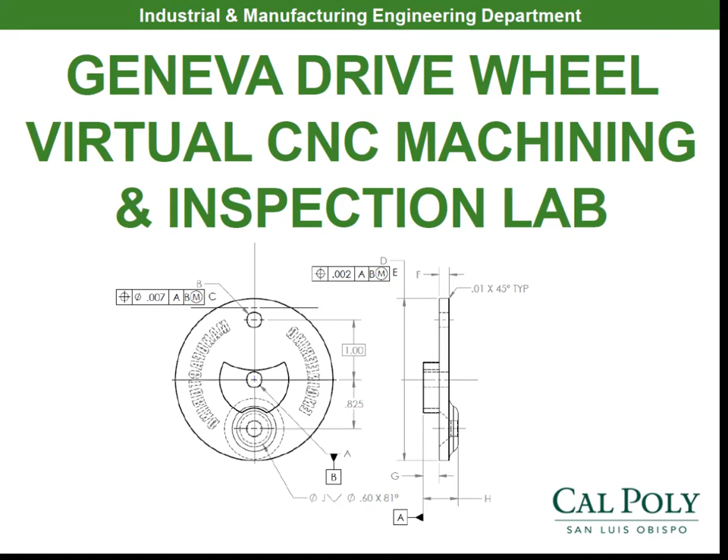Welcome to our Geneva Drive Wheel CNC machining lab. Today, I'm going to take you through the process of CNC machining the drive wheel for the Geneva Drive Assembly.

Remember, this Geneva assembly, when you rotate the Geneva Drive Wheel, it turns continuous motion into incremental motion. It's basically how a watch works, or the tool changers in the umbrella style Haas machine right here has a Geneva wheel inside of it as well. So when it indexes the appropriate tool position, it can take that continuous rotational motion from an electric motor and turn it into incremental motion thanks to the Geneva wheel.

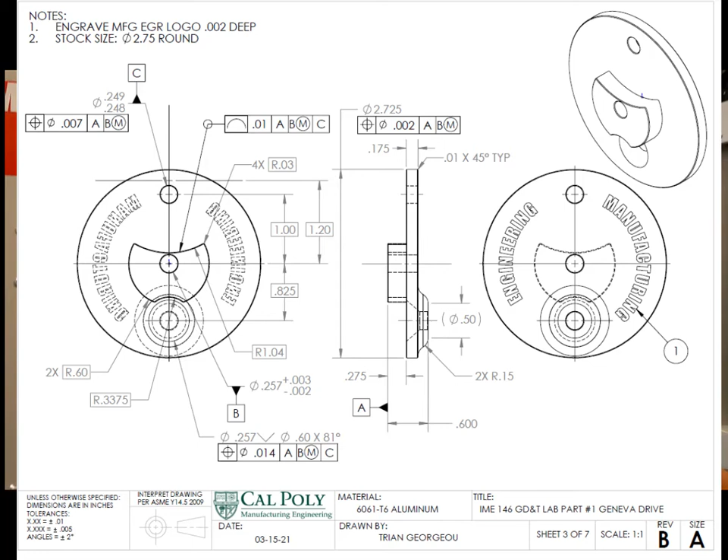The first thing we always do is look at our engineering drawing here for our Geneva wheel. We talked about how we programmed this from CNC operation number 1 and CNC operation number 2 in our lab presentation series, so hopefully you've watched that and know where the 0 points are located. Remember, the work coordinate system is on the B datum right here for the XY, so that's where the 0 point is. It's in the center of the part, or the stock.

We put all of our Z0 points at the bottom of our job. So we decided to start off with 2.75 inch diameter stock. If you look, the major diameter of this part is 2.725, so we'll end up machining 25 thou off the outside edges, or contouring the outside edges of this part at some point.

We will also use a face mill to qualify that surface. We'll use a 3/8 inch end mill to contour it, then we'll use a spot drill to spot drill the holes. We will then use the drill to drill the holes. We'll ream this tight tolerance 249 to 248 hole with a .249 reamer, and then we'll go ahead and chamfer the part right there. So that's going to be kind of the order of operations.

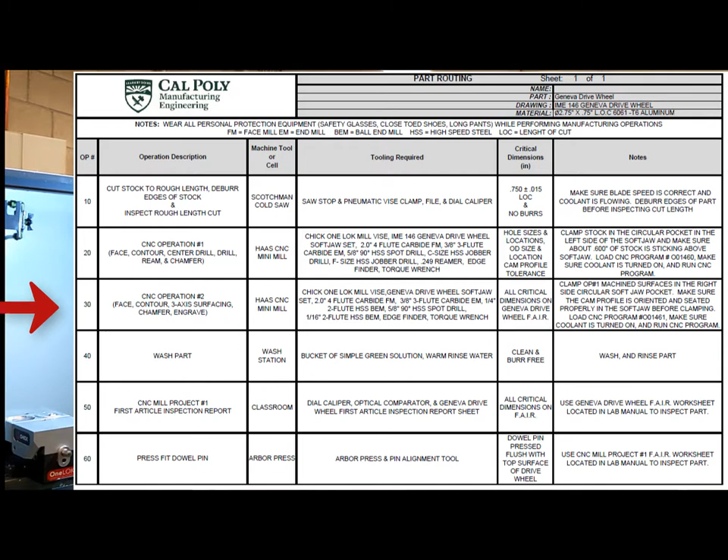Now remember, that's just for the first CNC operation. Check out this routing right here. The routing shows that the part goes first to the saw, where it gets cut to length. In the first CNC operation, it gets everything profiled. Then it moves on to the second CNC operation. After that second CNC operation, we go to the final first article inspection.

So let's go ahead now and start with that first CNC operation. When I look at that first CNC operation setup sheet, I see that my stock needs to be cut to a 3/4 inch length of cut. So I'm going to double check real quick with my caliper that my cut length is correct.

Remember, you zero out your caliper, you go ahead and measure your part, and you'll see I'm basically 7 thou oversized on this cut. We're not worried about 7 thou with that Sandvik face mill there. It'll take off that extra 7 thou, no problem.

So now that I know that I've got the correct stock size, I'm going to go ahead and grab a file, and I'm going to file the edges of my part. Now when we cut this with a saw, the part has burrs around it, all the way around the outside edges. So I use my file to go ahead and deburr my stock before I put it in the vise. If I don't do that, it could sit not parallel to the bottom surface of that vise because it's sitting up on a burr. So we get rid of all those burrs by filing in one direction away from ourselves.

And remember, away, file, lift up, return. That's the appropriate way to use a file. It's not back and forth. It's away from you, lift, and return. So once I go all the way around the part, file it all up, I just double check with my finger. Oh, there's a burr right there. Just double check so you don't have any burrs.

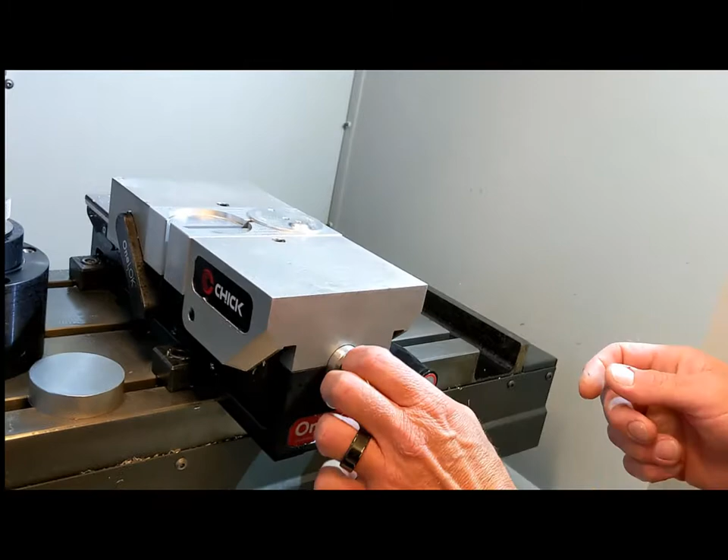Now, we're going to go ahead and check out the soft jaw here. Come on over, and you'll see this soft jaw has been fully contoured. I'm going to leave my wrench right there. Now, the way this vise works, it basically only needs a half of a turn to open and close it. The rest is done by this ratchet system back here.

So once I loosen it one time, I can go ahead and push down on the ratchet and basically move back and forth. So remember, to loosen it, you just have to push one side of it, and you slide back and forth. This only moves a 1/2 of a turn. So let's first put it back here.

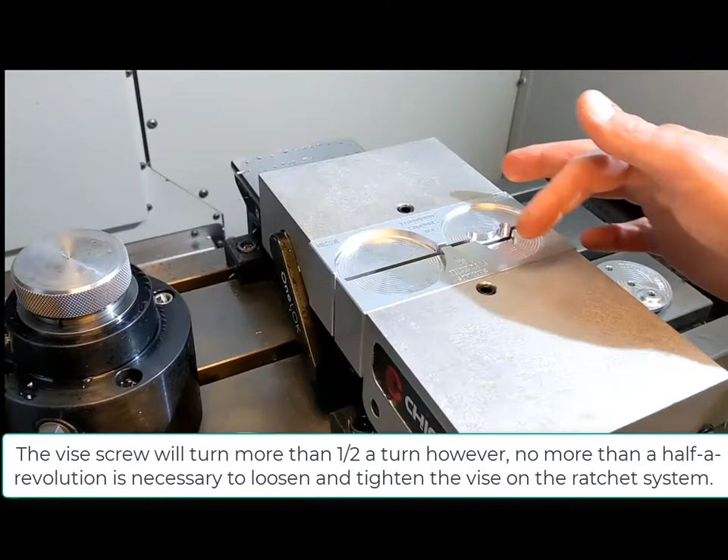This soft jaw has been custom contoured to grab our round stock. You'll see when we put the stock in the soft jaw, we spread it around far enough and put it down in there, it's got a custom pocket contoured to hold this 2.75 inch diameter stock. We want to make sure we deburr the edges, because we don't want any of these edges to mislocate the part.

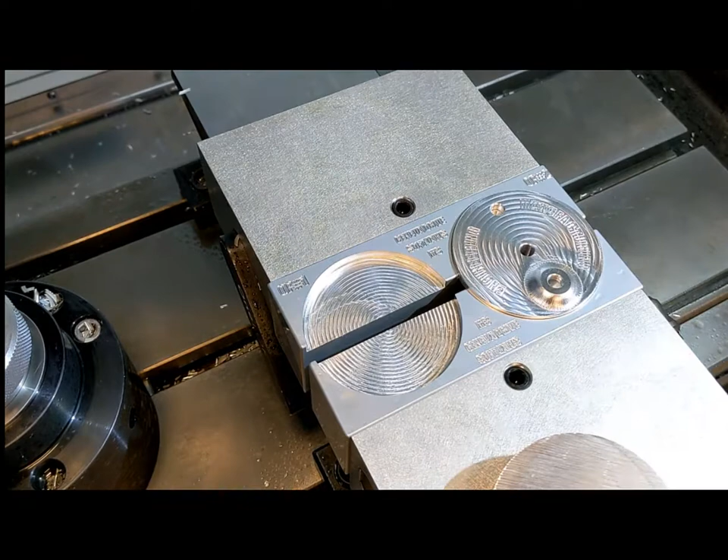Once it gets machined in operation number 1, there'll be a cam profile on the bottom of the part. This cam profile is important to keep the orientation consistent when I flip it from op 1 to op 2. In the soft jaw, we machined a profile down here to orient the part in op 2. So after we machine it in op 1, we'll flip it over, drop it down into there, and it'll orient itself in the appropriate location to get machined.

But before we get to op 2, let me slide this back a little bit. Let's go ahead and learn how to appropriately load and tighten this vise. What I like to do is make sure I'm in the middle of my travel here. If this is hard to turn, you should not force it with this wrench, or you'll end up breaking the vise. So you just want to make sure you can turn back and forth with enough travel both directions.

Once you do that, you put the part in the soft jaw and pull this as far forward as you can so it clicks in. Let me show you - if it was back here, you would just click it all the way forward like that. Now I go to tighten my part by hand, use my torque wrench, and double check that I'm at 10 foot-pounds of torque. I make sure I'm in the tighten position, so the lever's to the right, and I'll go down and tighten my vise like this.

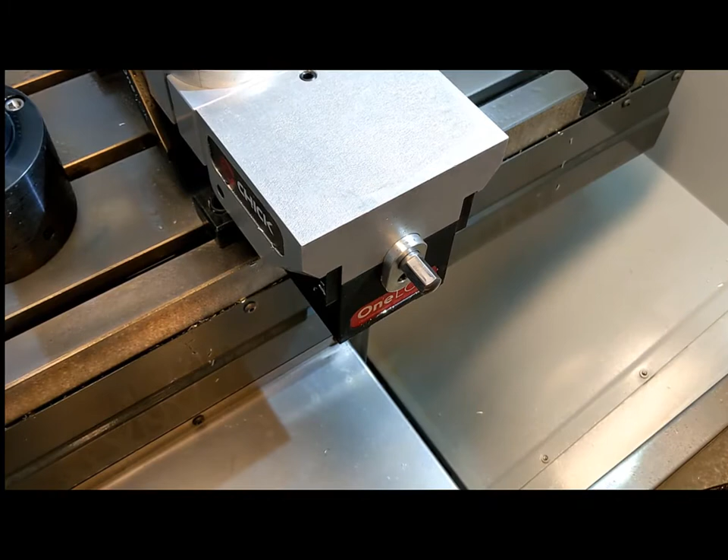Now you're going to see that we have everything tightened. So now we put the torque wrench on here and we tighten till we hear the nice little click. Now we know it's been torqued. To ensure our part is fully seated down here, we go ahead and take the dead blow mallet, give it a nice little tap down, and we're pretty much ready to go.

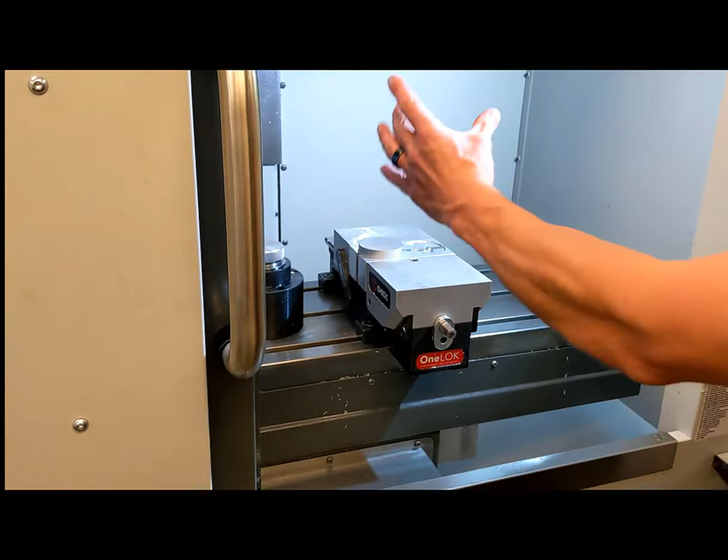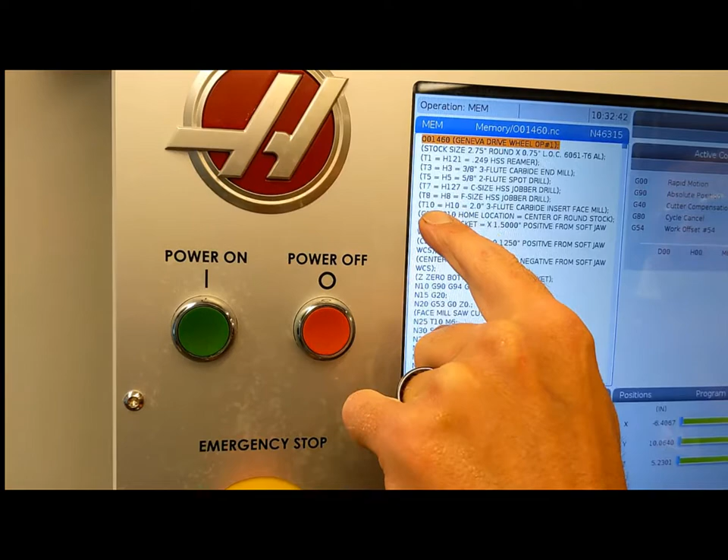So the stock is loaded. I'm going to close my door and come up here to double check my program - Geneva Drive Wheel Op 1 loaded. I definitely do. I'll just read the rest of this. We have the correct stock size. We have tool 1, height 121 for the reamer. That's correct. We have tool 3, tool 5, tool 7, tool 8, and tool 10. So it looks like I'm pretty much ready to go here.

Now that we've verified everything is good in the machine, we're pretty much ready to go - memory, reset, and cycle start, and start machining our part. Here we go.

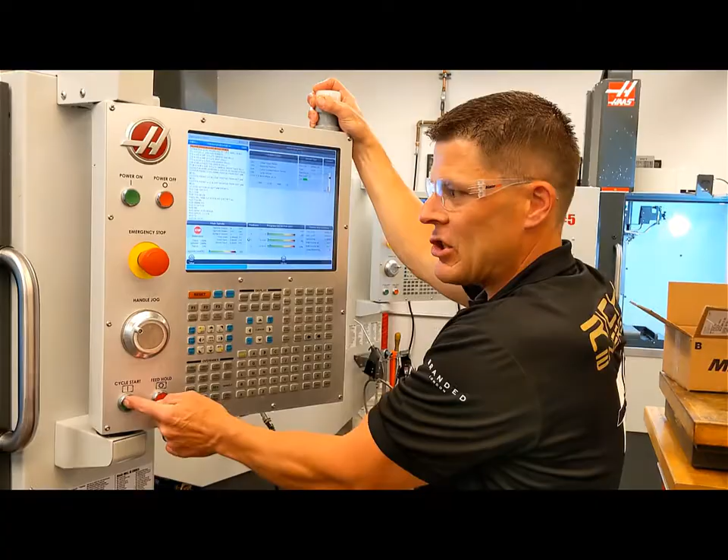So this face mill is facing ahead at 48 inches per minute at 6,000 RPM. We have optional stop on right there so we can show you what each tool path does. That first tool path pretty much just faced the top surface and leveled the playing field.

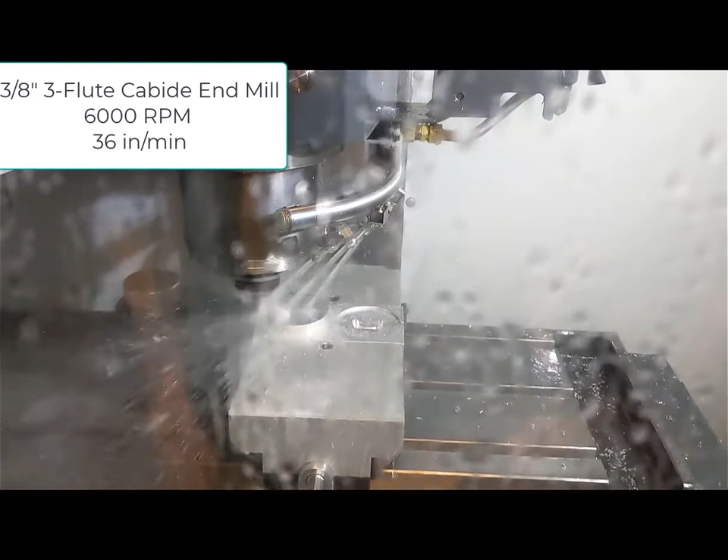Now we're going to bring in the 3/8 inch end mill to rough and finish the Geneva cam. This 3/8 inch end mill is set to a speed of 6,000 RPM. What surface speed does that end up being when this 3/8 inch end mill spins at 6,000 RPM? Can you reverse calculate that using your 4V over D equation? Go for it.

Now that you figured out the surface speed, we are actually running 36 inches per minute for this end mill. If this end mill is running 36 inches per minute at 6,000 RPM and it's a 3-flute, what chip load are we actually running at? Remember, feed rate equals RPM times the number of teeth times the actual chip load. So solve for the chip load now that you know the RPM and the number of teeth.

So what this tool path's doing, it's spiraling in towards the center, and at a certain point it's going to start cutting the cam once it removes enough material, the Geneva cam. Now when we look over here at the code, you're going to see that this code is just moving X and Y all in one tool path. The Z's are going to be the helixes down, where it's moving up and down. But these are simple 2-axis tool paths.

Now at this point, it's going around the outside profile to machine that outside diameter. Now that it's machined the outside diameter, it's going to come in and finish the profile that has that profile tolerance on it with the 3/8 inch end mill in that Geneva cam.

All right, now before we go on, let's check out the part. You'll see we've roughed out all the material and finished the outside diameter and finished that cam profile.

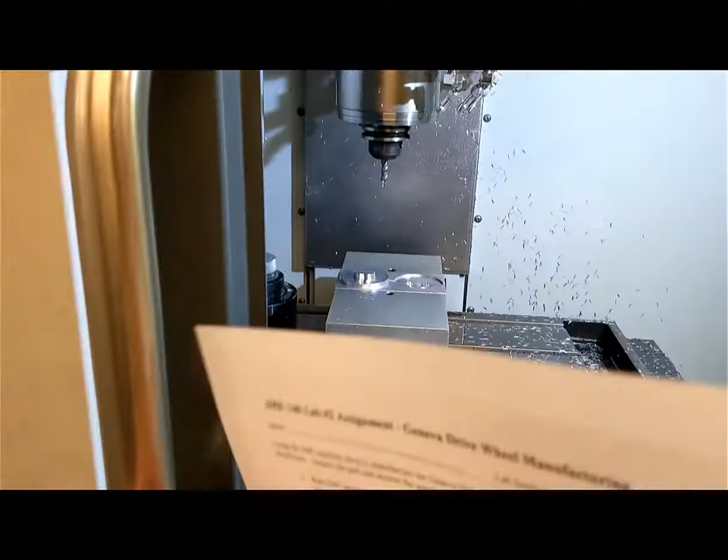So what's next is we're going to grab that spot drill and spot drill the hole locations for the part. Now this is a critical operation because these hole locations have tight positional tolerances in reference to each other. There's 1, 2, and this one's a countersink, so it's going to be a big one.

Excellent, so we have that countersunk hole now for the screw to sit flush for the handle. And we have the other 2 holes ready to go ahead and ream it. So you can see that right there.

So now that we got the hole spotted, we're ready to get the C-size drill out and go ahead and drill the hole for the ream. Now reamers don't like to take off more than about 10 thou of material.

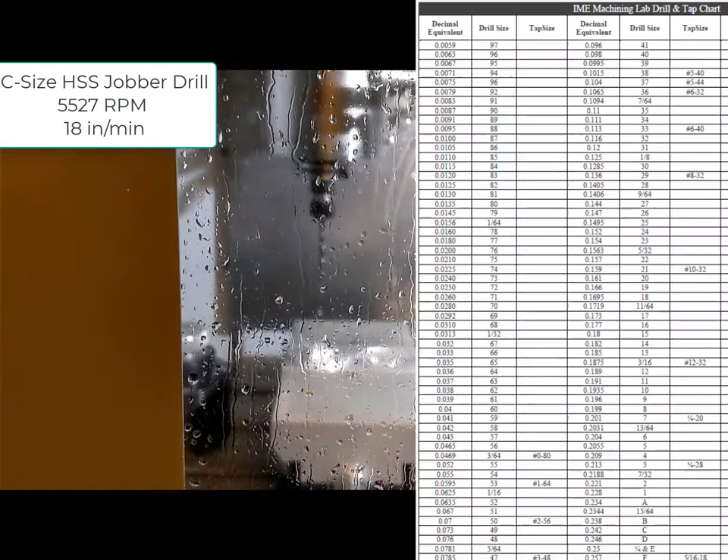So this C-size drill bit has been selected to drill the hole for that .249 hole, the .249 or the .2485 reamer. So what size is that letter C jobber drill? Look up in the drill and tap chart and tell me how much we're actually taking off in order to get from the C-size drill to the actual reamed hole size.

But now that we got that hole drilled in there, you can see that, we are going to move on to the F-size jobber drill to drill the holes.

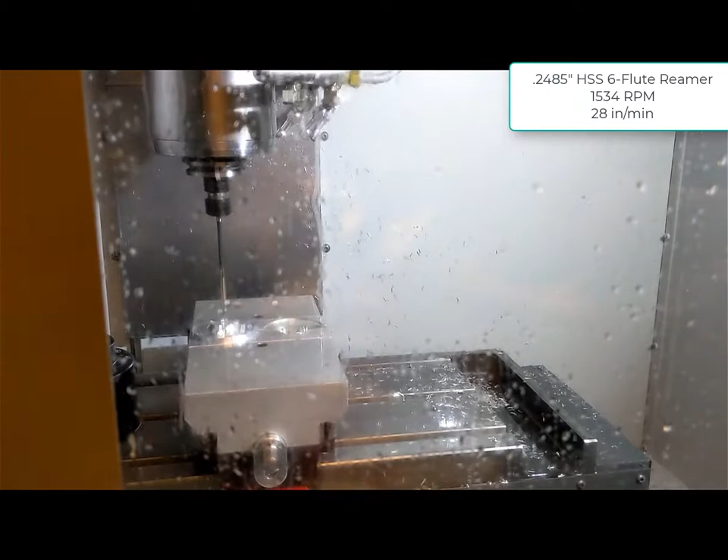At this point, we're grabbing the F-size jobber drill. It drills straight through the part right there, no pecks. And we're going to open that up and show you that all the holes are now created in this part. So what's next?

We got to make sure we don't cut anybody when they hold on to our Geneva Drive Wheel. So we're going to get that tool 5 out again, that spot drill, and chamfer the entire part.

Now that the program's all done, we switch back to the original tool, so it's ready to go again when we load up some more stock. Bring the table forward for the operator. I'll open the door and we'll see how we now progress to the next CNC operation.

So I'm going to grab my torque wrench. I'm going to open up the vise. And remember, I just did a real quick turn and I slide the vise backwards to pull the part out. So you're going to see there, we now have the full profile of the part machined right there.

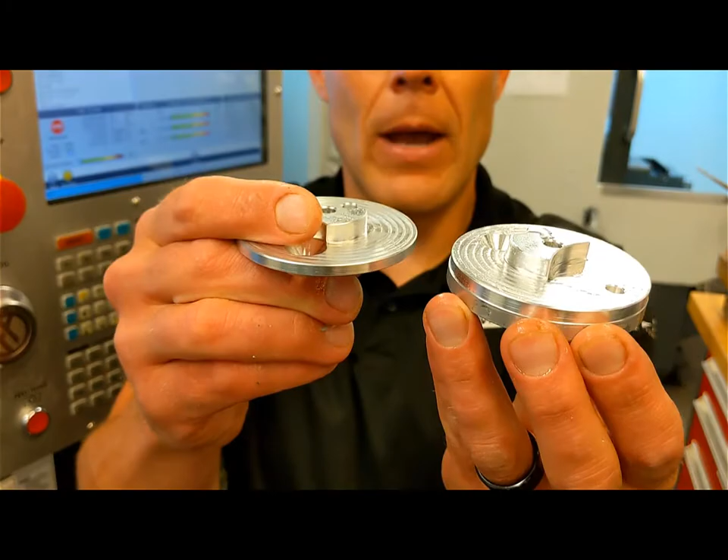You see that? So we've got to go ahead now, flip it over and get rid of all this extra material on the top so we can make that little 3-axis hump. And we can see the difference between 2-axis and 3-axis tool paths, like I showed you in the programming stage in the CAM presentation video.

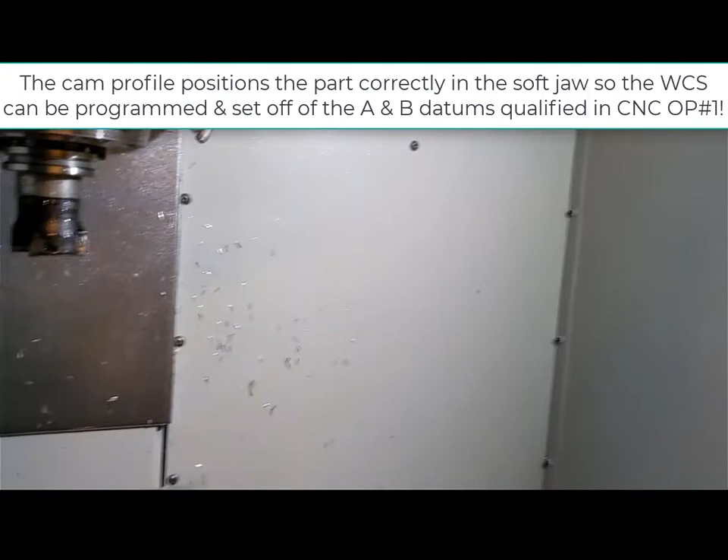So in order to orient that correctly, remember our soft jaw is going to grab this cam and orient it appropriately in the machine. So let me put back that part. We're going to come back over here. I'm going to move the vise over a little bit so we can see it better.

And what I'm going to do is put it down here in the soft jaw. You're going to see that it locks into the correct position right there. You can't twist it anymore at this point. I pull that forward and then I hand tighten my vise.

At this point, I'm going to grab my torque wrench, put it on to 10, and torque down my part. Once I torque it down, I like to use the dead blow hammer to make one tap on the part so it fully seats in the vise.

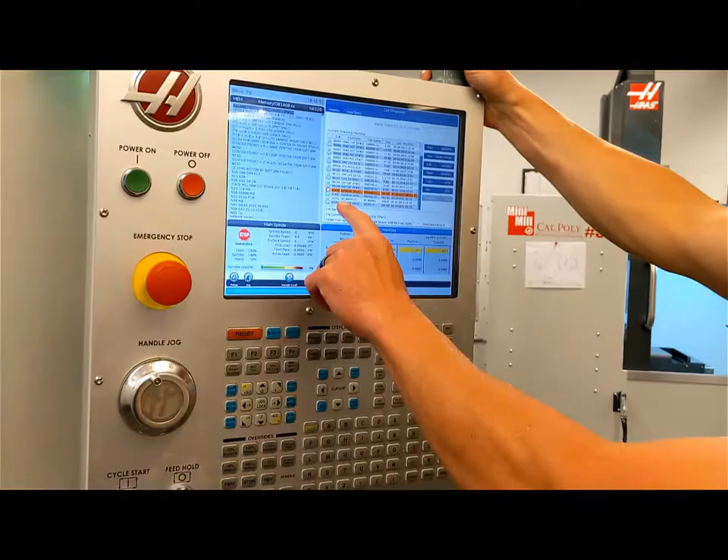Then we'll close the door and come over here to the control, and when I hit list program, I can now move over to my Geneva Drive Op 2. When I select that one, I come down here and hit select program, and then when I hit memory, it says Geneva Drive Wheel Op number 2.

Stock size machine Op 1 blank, we got that. And we got tool 3, 4, 5, 6, and 10 now. So we're gonna go ahead and use the 3/8 inch carbide end mill to rough away all that material off the top.

We're gonna use the 1/4 inch 2-flute ball end mill to go ahead and do 3-axis work on that protrusion sticking up with the fillets on it. We're gonna then use the 5/8 inch spot drill to go ahead and chamfer the holes and the outside of the part. And then we're going to use the 1/16 inch 2-flute ball end mill to engrave the best major in the world, manufacturing engineering, on the part.

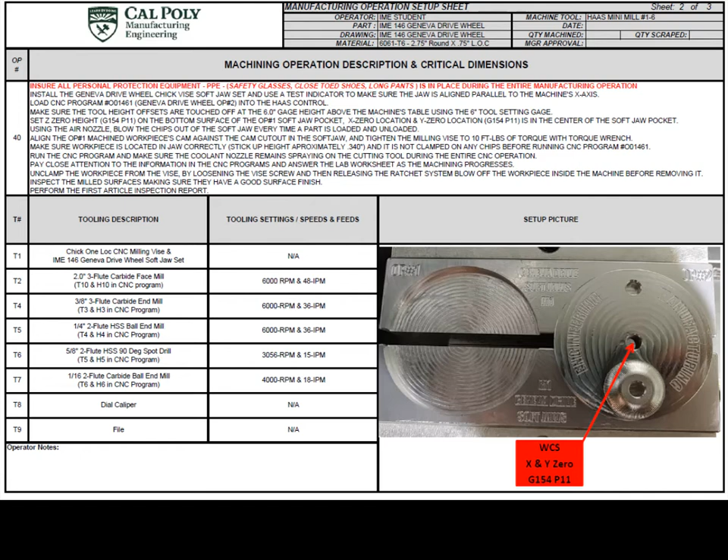So here we go. Cycle start.

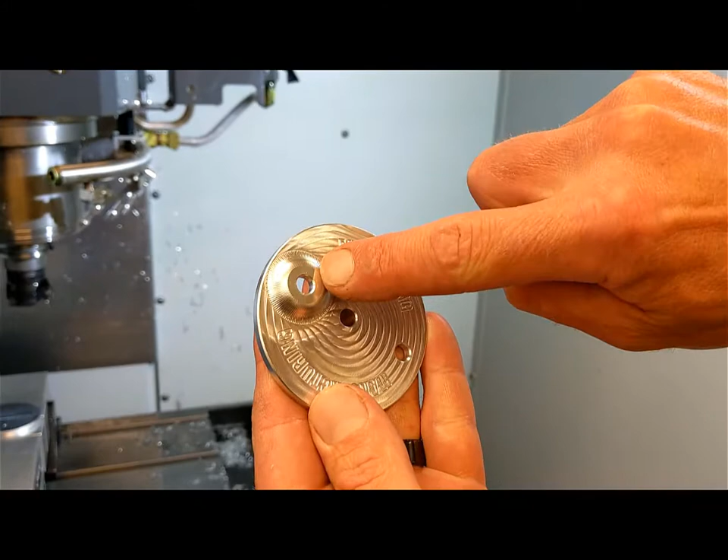So at this point, we'll go ahead, check that out. You see, we see the hole from Op 1 right there, but we've now faced it down to the appropriate height. Now that appropriate height isn't the height of the top of the part right here, it's actually the height up here. So we faced it to this height.

Now we're going to use the 3/8 inch end mill to rough the rest of this other material away. So here we go.

All right, so that basically roughed out. That was a 2-axis tool path. So it moved down in the Z and then moved in the X and the Y, and it roughed out the big amount of material needed to go ahead and now use a ball end mill to go ahead and finish the 3-axis milled surface.

So we're going to use that ball end mill to rough and finish now the 3-axis surface. Here we go.

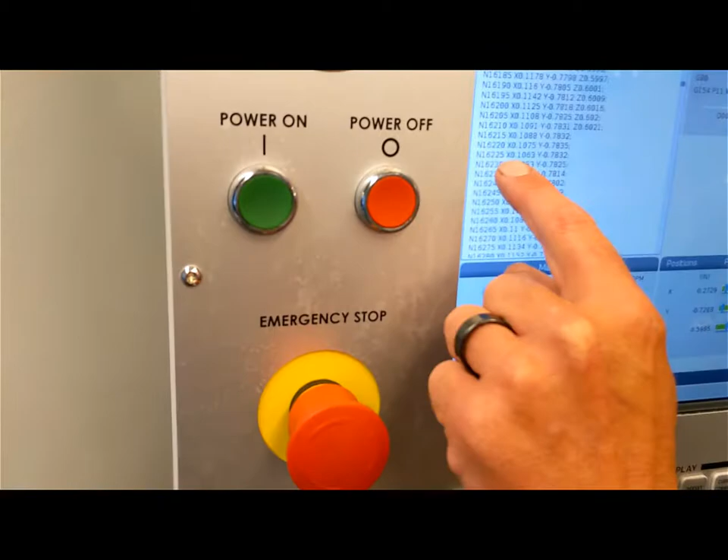All right, now you can see it. Let's check out the screen right here. You'll see there's XYZ moves on every single line of code right there. In fact, it's verifying that it's at all those locations with that encoder.

It can think, or it can process data faster than we can even think. So now check out this code right here is making a move up and down the sphere right over there with those 3-axis moves.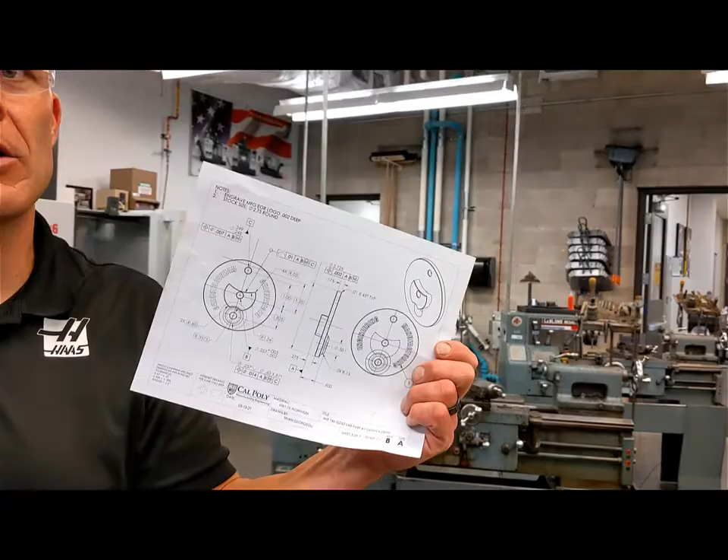So this is our Geneva wheel. We now need to take our engineering drawing and bring it over into the inspection lab to inspect these true positional tolerances. Join me over in the inspection lab, and we're going to see how close we are on our true positions from the B datum to this hole, and our true position for the outside diameter to the actual B datum. I'll see you soon.

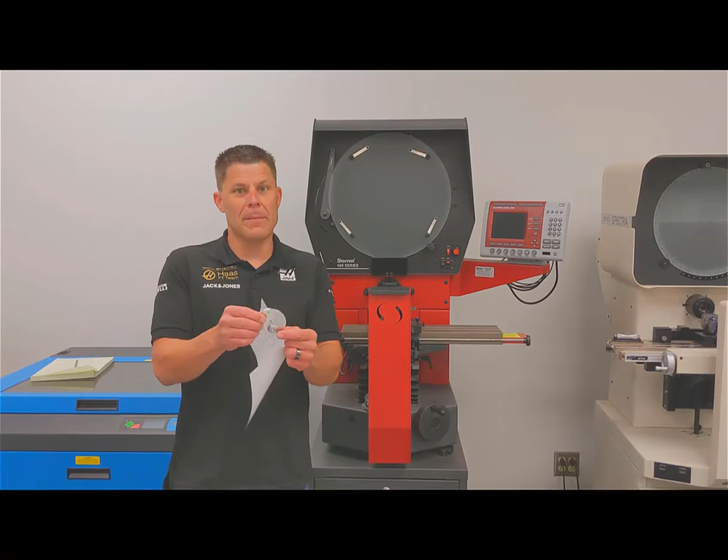Welcome to our Geneva Drive Wheel's first article inspection demo. Today we're going to learn how to calculate the positional tolerance for this hole and this outside diameter relative to the B datum right here in the center of the part.

Looking at this engineering drawing, we see that the main datum is the B datum. The A datum is the bottom surface of this part, so the B datum right here is this .257 hole. Everything rotates about this .257 hole. That's why it's the datum - it's the main feature on the part that everything relates to.

Now, in order for the Geneva Drive Wheel to drive the Geneva wheel, there's a pin located in this upper hole, which we call the C datum. We'll talk about that in a minute. But this hole is going to be positioned relative to the B datum, basically perpendicular to A right there.

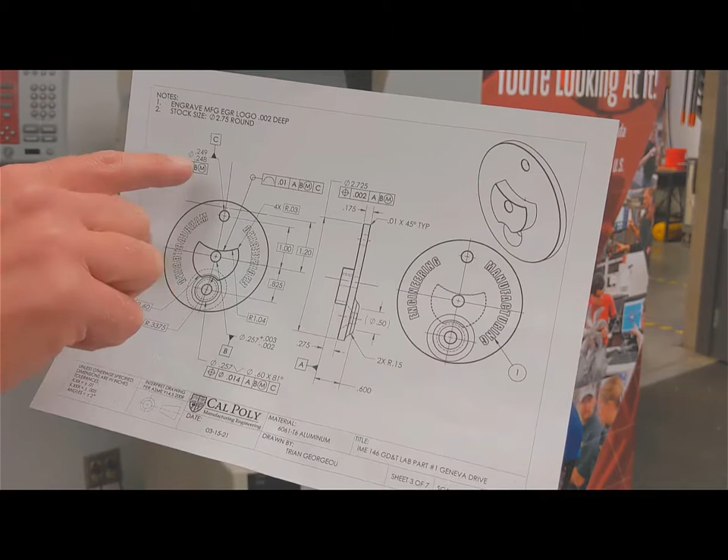So we're going to check to see if this 0.249 to 0.248 hole is first in size. If it's within the size limits, we're going to calculate the positional tolerance and make sure it's within the diameter tolerance zone that it needs to be within for the design to function appropriately.

After we do that, we're going to check the outside diameter of the part, the 2.725 inch diameter, and make sure that positional tolerance is within 2 thou of the B datum when it's at its maximum material condition. So we're going to do that on our optical comparator.

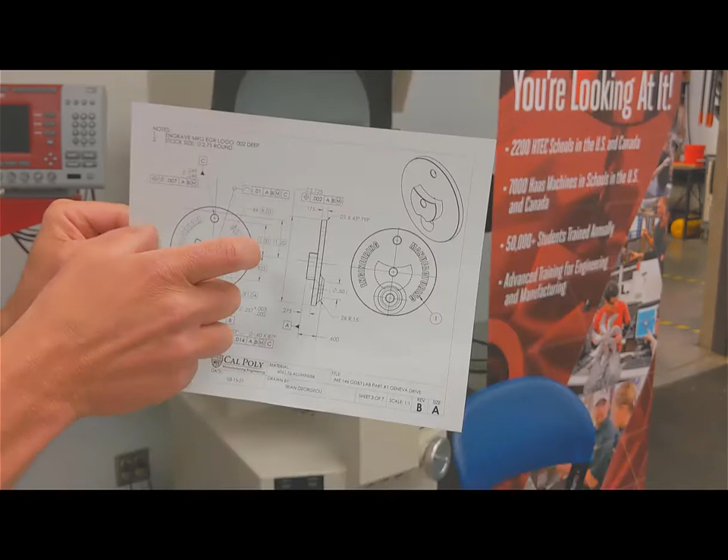We wouldn't be able to do this by measuring it with a caliper unless we had some sort of fixture to show us the delta X measurement and the delta Y measurement from true position. Let me explain that a little better here.

So when we have a positional tolerance measurement, we're measuring how far we're off from true position. For example, if I looked at my drawing and saw that the datum, A, is at this point, I will have a basic dimension locating the true position of a hole off of that datum - a basic dimension on the drawing in both the X and the Y axis.

When you go to actually inspect the actual part's location, you'll see when we manufactured the part, let's say the center of the hole was placed right here. What we've got to do is determine how far we are off from true position in the X-axis and the Y-axis.

To do that, we're going to first set up the optical comparator over here to zero it out on the center line or the center datum on the part. Then we'll measure the hole's location and determine how much delta X and delta Y we have from that.

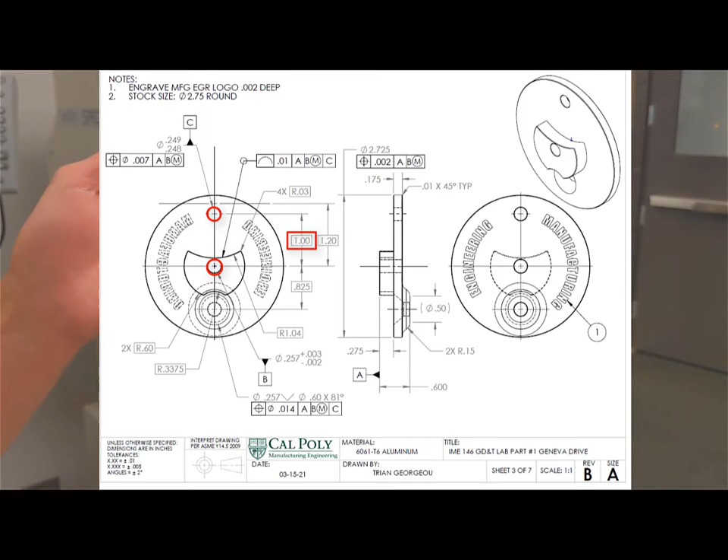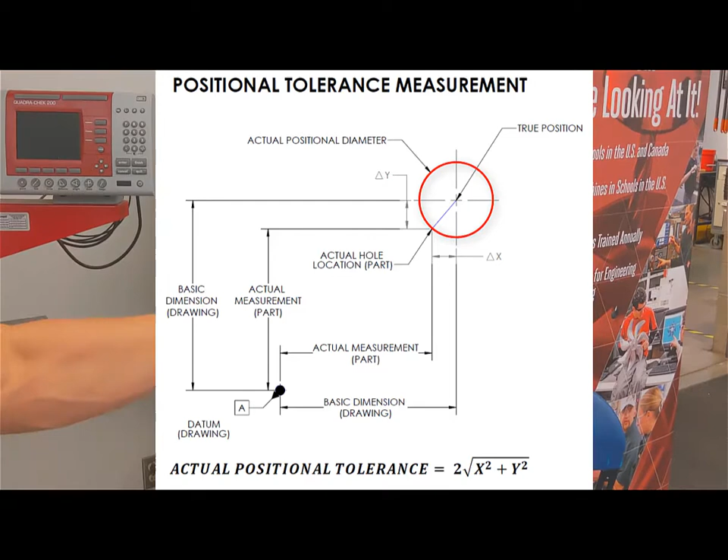We'll get the actual part measurement there, and then we'll do a simple calculation using the Pythagorean theorem to figure out this radius value, and when we multiply that by 2, we get the diametrical tolerance zone, or the actual positional diameter that the part has. We'll compare that to the actual tolerance on the engineering drawing and make sure we're under that size. So let's go ahead and do this.

Remember, we're filling out this first article inspection sheet as we go through here. So looking at that sheet, we're going to first find the feature ID A, the center datum hole size. Let's do that real quick.

Now, this is an optical comparator right here - a Starrett optical comparator. Just so you know, cost, it was about $30,000 in 2015. It's got a control panel over here that can calculate radii, circles, distances, and angles out there in space.

The whole principle of an optical comparator is to magnify your part. There's a set of lenses in here that can be replaced. You can get 25 times magnification, 10 times, 5 times - different magnification levels. I believe what we have right now is 20 times.

It says X20 right here. So the way it works is there's this lens right here. When I turn the power on, I have a surface and a profile light. What that surface and profile light does is it allows me to either look at the surface of the part magnified or a profile of the part.

I want to go ahead and look at a profile of the part because I want to look at the holes. It'll be a black and green image. Wherever there's a hole, it'll be green. Whenever there's material, it'll be black or a shadow.

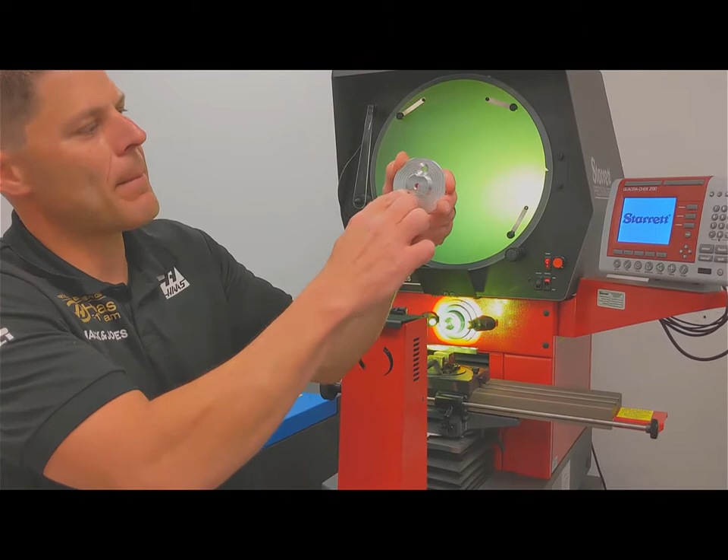Now you're going to see we're going to have to fixture that right here in order to measure our part. We're going to first place this parallel bar down on the vise, because we're going to locate this part on the cam profile. We're going to set it down on this cam profile, which will orient it in space the way it's supposed to be oriented on the engineering drawing.

At that point, we can then focus it and figure out where this center hole location is. So to fixture this, I'm going to put it down on the optical comparator in the vise, make sure it sits nice and flat on my parallel, and then I tighten my vise down so my part doesn't move.

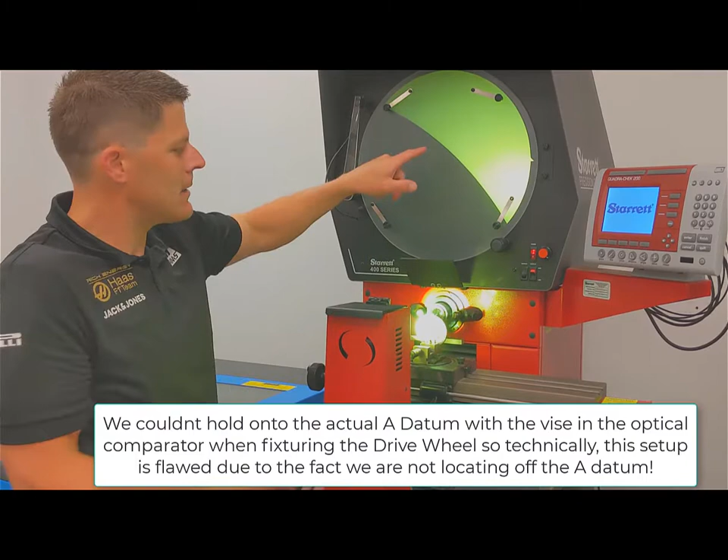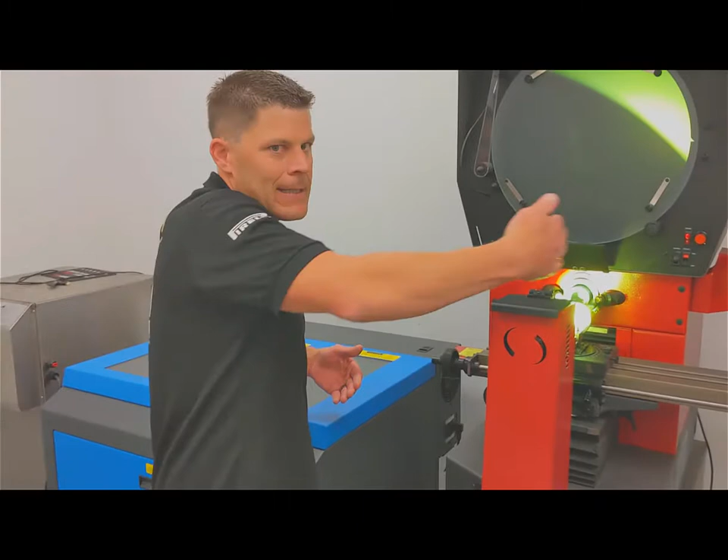Now you'll see up here on the screen, I can see some of my part. The way it works is there's handles right down here. This handle is technically the y-axis. This handle right here is technically the x-axis, back and forth. Z-axis is focus. So the focal length is the z, x is this direction, y is this direction on this machine.

So our goal is to find the center hole first. Let's move it over. That's the upper hole, so we'll go down. We want to go ahead and line up the crosshairs in the center of this hole. So you'll see I center my part right there. And now I want to get a nice, good, crisp image of this hole.

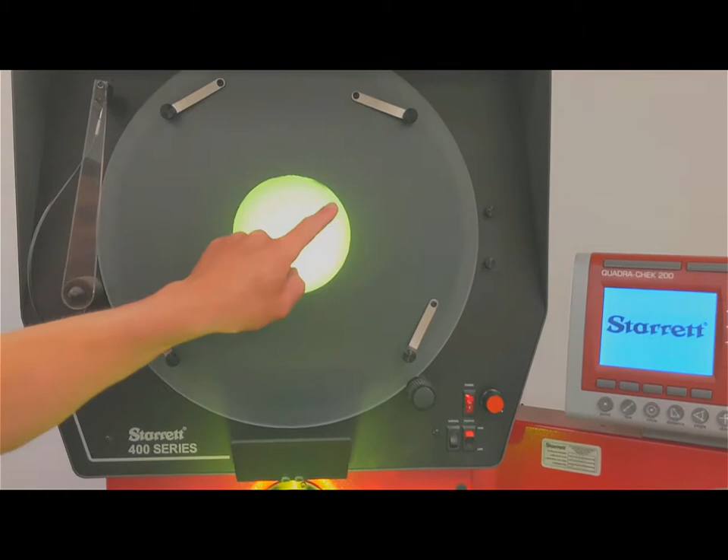But because that's where I want to zero out the machine, I'm going to now come over to the control right over here. This control says zero. When I go ahead and press enter, it has zeroed itself out right wherever I first start up the machine. I can zero it out by pressing these buttons anywhere I want on this machine.

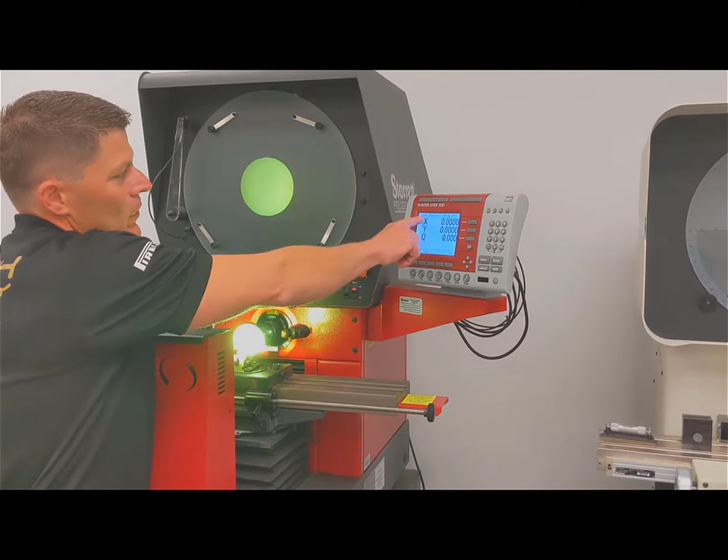Now, whoever was using it last, it was me, left three different measurements in there. So I want to delete the measurements from the last person using it. To do that, I simply hit menu, I hit the button down here that says clear, and I hit clear all. And it says, do you want to clear all these features, datums, and skews? I hit yes. So now we're 100% cleared out.

Remember, our goal is to go ahead and figure out the location of everything based off the center line axis of this datum, or this hole. So we're going to locate this hole and then zero out the control at that zero point. To do that, I've got to go ahead and find the center of a circle. If I press this circle button right here, it's going to ask me for a minimum of 3 points. It only takes 3 points in space to determine the diameter or a radius of a circle.

However, the more points you give this machine, the better. So I'm actually going to give it 6 points so I can be a little bit more accurate, get a little bit more data, a little bit better calculation. The way this works is, in order to pick points, I've got to line the crosshair up on the edge of the part, all the different edges. So I'm going to work my way around, move over here, and line it up.

When it's lined up, I press this enter button right here, and it's stored one point. I'm going to slowly work myself around. The more accurate you are lining up those crosshairs, the better measurement you're going to get. So I just press enter again and move my way around.

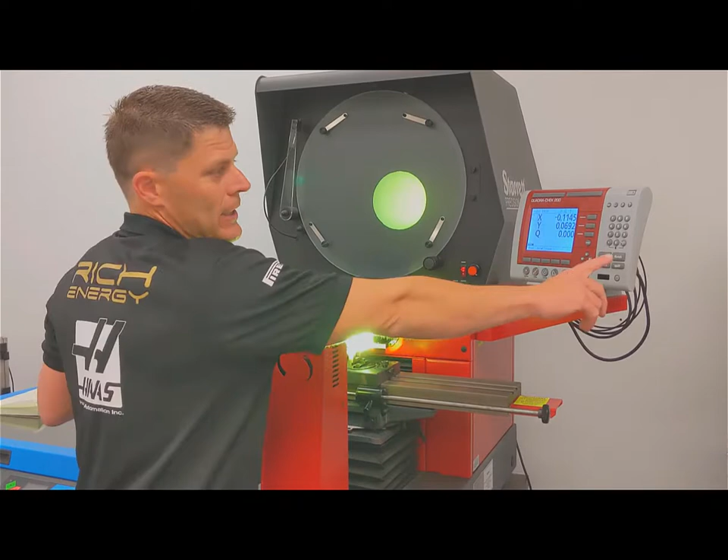So I've got 6 points. When I'm happy with the amount of points I've chosen, I hit the finish button right next to enter. Now if you look, it's .2604. On this part, I'm right on tolerance, 260. I'm 4 tenths out technically. It's most likely my points that I picked really quickly, because I actually measured the part before and got 259.

So again, this is what I'm going to put down on my inspection report. This is what I've got right now. We're basically at 0.2604, 4 tenths out. We could technically measure it again, but we're going to just keep going from here because this is about learning how positional tolerances work. And if our part's bad, our part's bad. We can make another one.

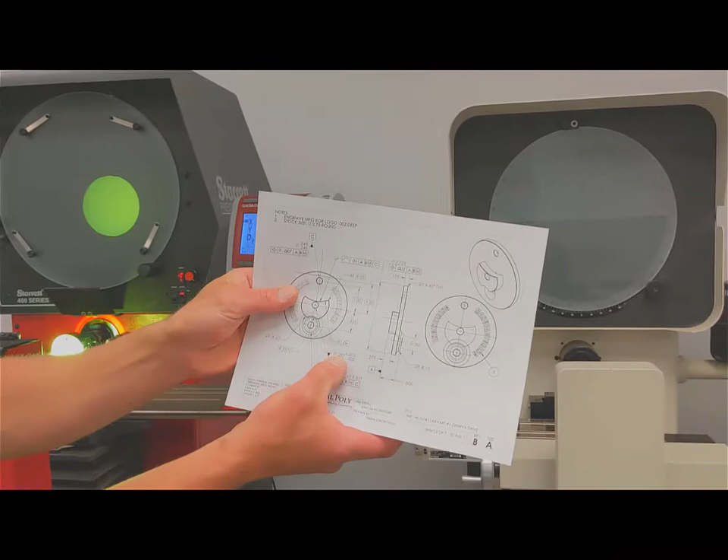So right now, if we look at this screen, it shows me the diameter, 0.260. When I look at the drawing, the part has to be anywhere between 257 plus 3 thou minus 2 thou. So we're at 260, 4 tenths over. We're going to call it good and just keep going.

So now I want to go ahead and zero out so everything is based off of datum B right here. To do that, you'll see I'm -1 thou and 3 tenths away in the X, and I'm 4 thou and 8 tenths away in the Y. So when I press down arrow, it gives me the coordinates I'm currently at. I'm going to move it back to 0, where 0 is.

So I was -1 thou and 3 tenths, if I remember right. There, whoops, there it is. And I'm going to zero it at that point. Now I'm going to move my Y, sorry, and I think that was 4 thou, if I remember right, 4 thou and 8 tenths.

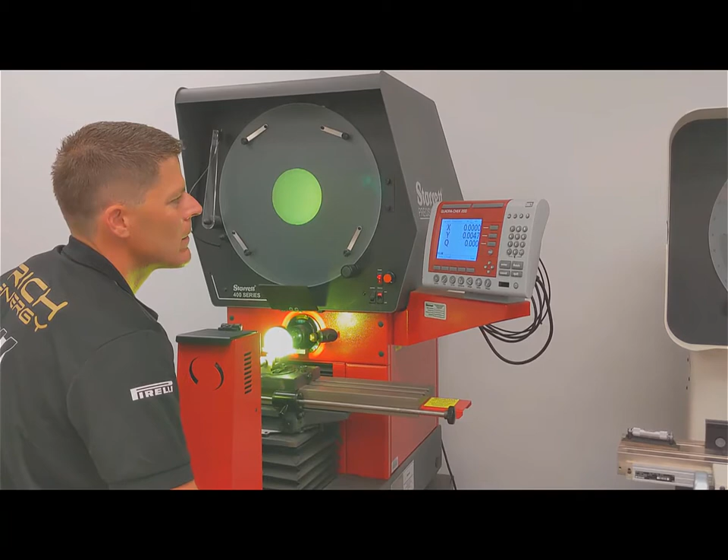We can always go back and double check afterwards. So I'm right there. If I hit 0, now if I press upwards, you'll see my new position in that circle is based off of where I just origined it out. I'm 1 ten-thousandth of an inch off, right?

So I'm literally going to go down, and I'm going to go -1 tenth. I think it was -1 tenth. And I'm going to hit origin there. Now when I go back up, I'm at 0, 0 for my circle. So I've now set the datum on the optical comparator. I can relate everything to the datums now and figure out my delta X and delta Y values in order to calculate the true positional tolerance of the features on this part.

So let's go do that. The next thing we're going to do is find this hole location right here. So I'm going to crank the optical comparator down, which moves up, right? So if the part goes down, we go up. It's a little bit opposite, right?

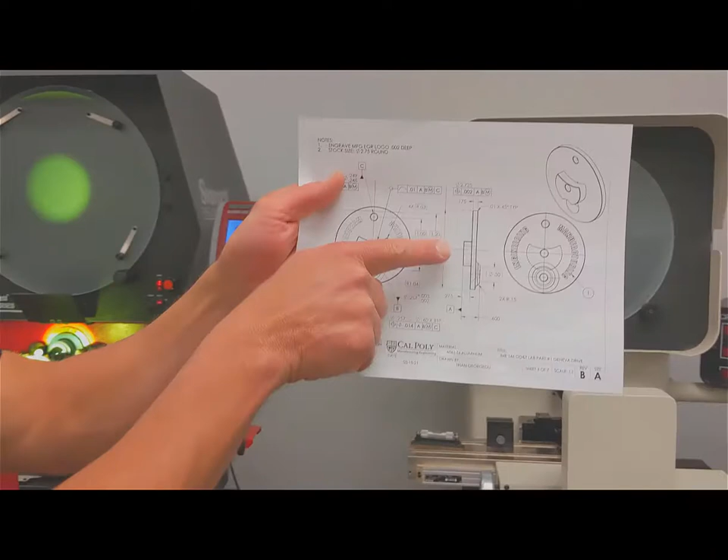So here we go. I now have the other circle in my sights. The problem is the circle is not in focus. The reason is it's got a different focal length compared to where the center of the circle was. If we look at the engineering drawing, our focal length last time was at the beginning right here. We now need to adjust our focal length inward a little bit by adjusting the Z-axis. So to do that, I move this dial right here, and I get a nice crisp image of that hole.

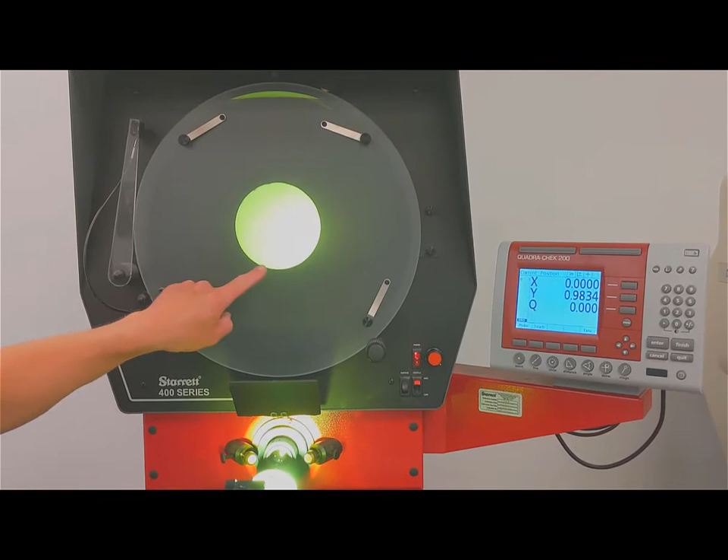Can you see the difference between a reamed hole and a drilled hole? I definitely can. Do you see how perfectly round this hole is compared to the actual drilled hole? You don't see any little lumps or anything like that on the sides of it. So hopefully we'll get this one in tolerance.

Let's check it out. So now that I'm here, I want to go ahead and measure a circle again. I'm going to click on circle, and I'm going to grab 6 points this time again. So moving over, I move over to this point. I press enter. Come over here, I'm going to go up this time. Press enter. Move over. Enter. Enter.

It's backwards compared to a regular machine. That's why you see me going backwards. It's a mirror image.

Enter. Now maybe one more at the bottom. We'll grab 7 points on this one. So when I hit finish there, I get 0.2495.

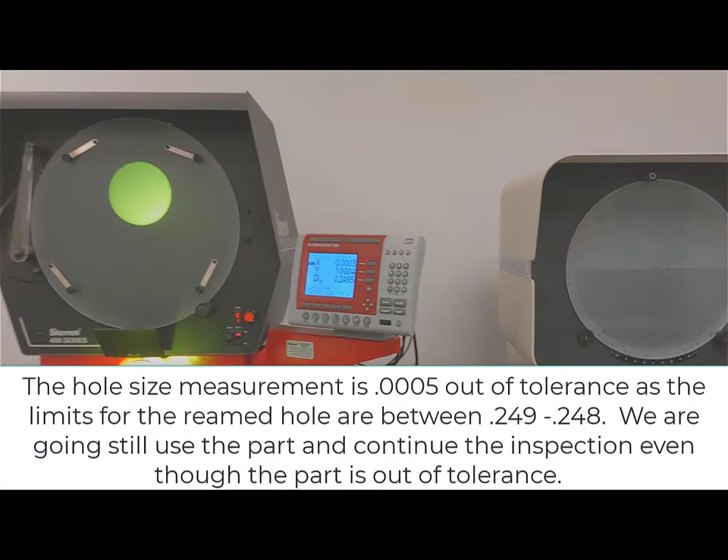So looking at the drawing, we're supposed to be between 0.248 and 0.249. We're 5/10 out on this one too. Who knows? This thing might be out of calibration. It hasn't been calibrated since 2015 when it was purchased, but the Starrett tech came in and calibrated it. But again, I'm pretty happy with that. So we're going to go 2495.

So let's check out these other numbers here, and let's see how they make sense with our engineering drawing. So when I look at that, this hole is at 0.2495, but it is -3/10 out in the X. So it is off position by 3/10,000ths of an inch in the X-axis right there. Now in the Y-axis, it is 1 inch and 4/10,000ths of an inch away from the actual datum.

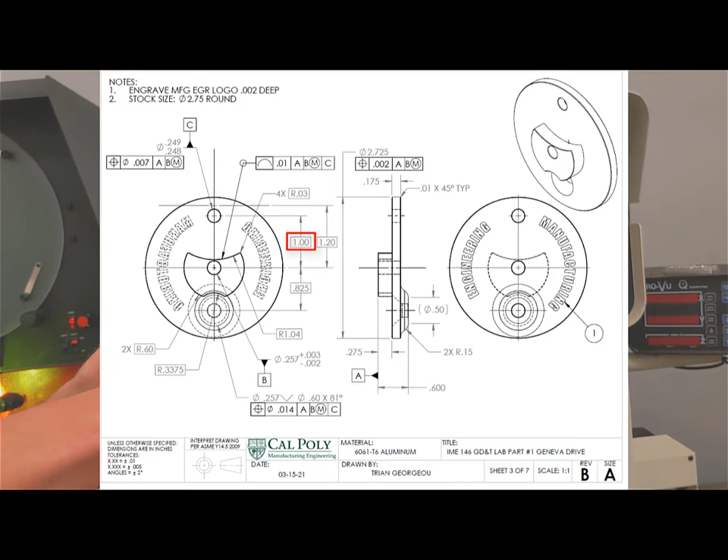But when I look at the basic dimension right here, you'll see that it's got 1 inch. So I need to subtract that 1 inch basic dimension from the 1 inch and 4/10,000ths of an inch, and I get a positive 4/10,000ths of an inch right there. So I'm 3/10,000ths out in the X and 4/10,000ths out in the Y.

We're going to go ahead and calculate how that works here in 1 second, but we're going to get the rest of the measurements first, and then we're going to come out and calculate it together. So I'm going to write that data down real quick. I was right here, my X, I was 0.0003, and Y, I was basically 0.0004 out right there. So that's my delta for basically the 0.249 diameter hole.

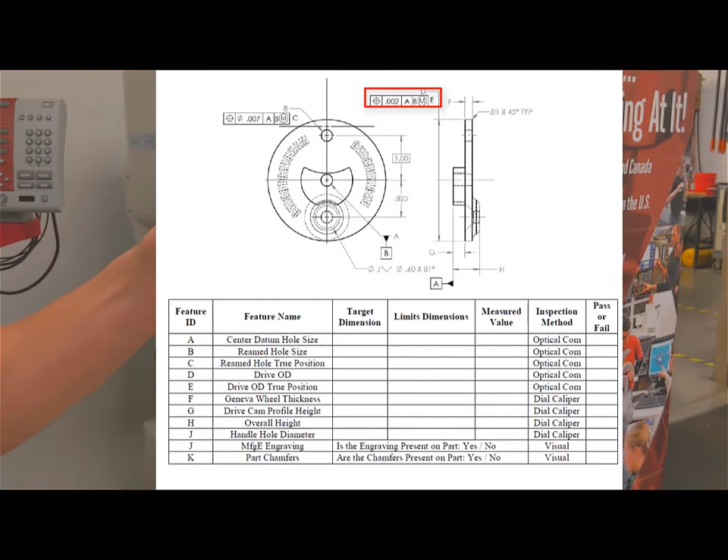So we're going to use that in some math, but before we do that, I want to grab the other positional tolerance right here and the diameter before we go on and do the math together. It's easier to do everything on the machine and then jump into the actual whiteboard over there and do some math. So the next thing we've got to do now that we've got that measurement down, I'm just going to write down my measurement as well, just so I have the diameter.

0.2495 was the diameter, just to have it in my notes right there. So the next measurement is outside diameter. I'm not going to be able to get down to all the points around the bottom there, but I can get most of them, very close to almost all the way around the part. Doesn't matter though. I'm going to grab 4 or 5 points all the way around, and we'll figure out where we're at positionally against that B datum.

So to do that, we got to call up another circle. So I hit circle, I move all the way out over here, and I'm going to just start right down here. You're going to see I'm going to come around tangent edge just because, and I'm going to call right there my first point. I'm going to press enter, work myself up and around this circle a little bit. Just remember, the more points, the better. More data, right? So I'm going to line that one up right there, press enter, work myself around.

I'm going to come right over here, enter, come back around up more, maybe come to the top of the circle a little bit, press enter, just come back over here, give it another data point, enter, come back around here, enter. I got 7 points. Let's just go a little bit more.

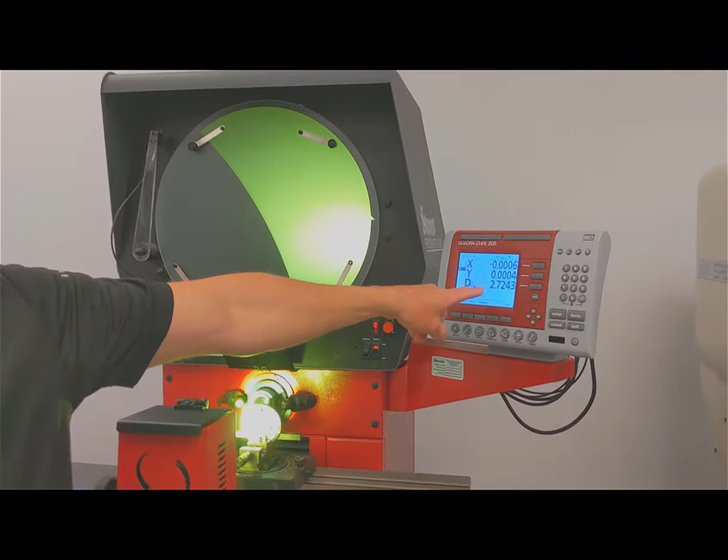Enter, finish. So, looking at this one now, we are basically at 2.7243. When I look at my engineering drawing, we're supposed to be at 2.725. So we are basically 7/10,000ths of an inch out on our tolerance there.

And looking at the positional tolerance, this one's a tight one because we're holding on to it, and we're in this second CNC operation, and we're relating basically all the features on that second side to this outside datum. Technically the reason we made it so tight is because we're holding on the outside, but the real datum is the B datum. So that's why we related these two to each other very with tight tolerances right there. So it's part of design, right?

When you're designing something, you've got to think about how you're going to manufacture it as well.

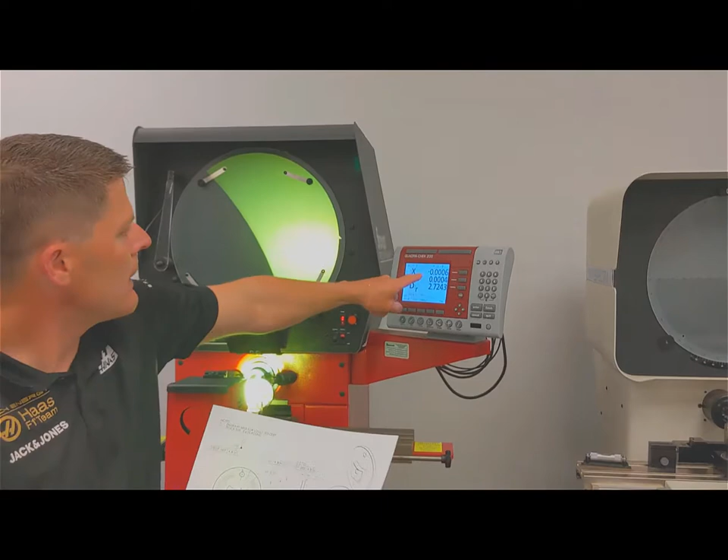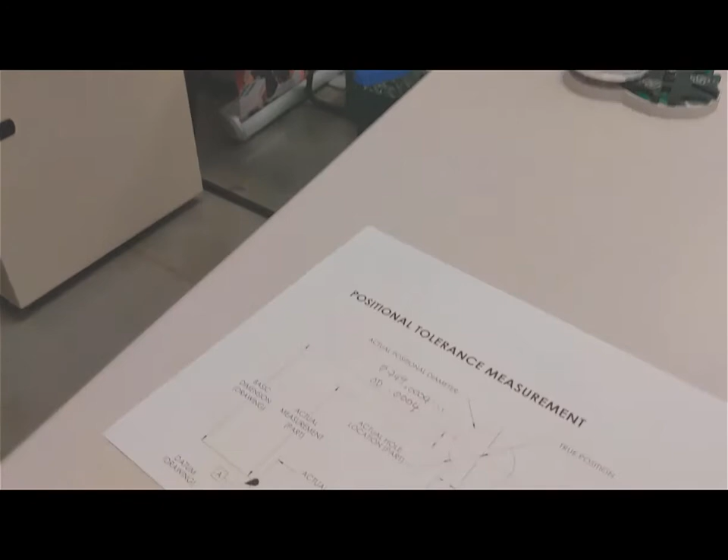Looking at this value, the X is at negative 6/10,000ths of an inch, and the Y is at a positive 4/10,000ths of an inch. So for the OD, the delta X is 0.0006, and the delta Y is 0.0004. Now we're going to walk over to the chalkboard, and I'm going to show you how to calculate the positional tolerance.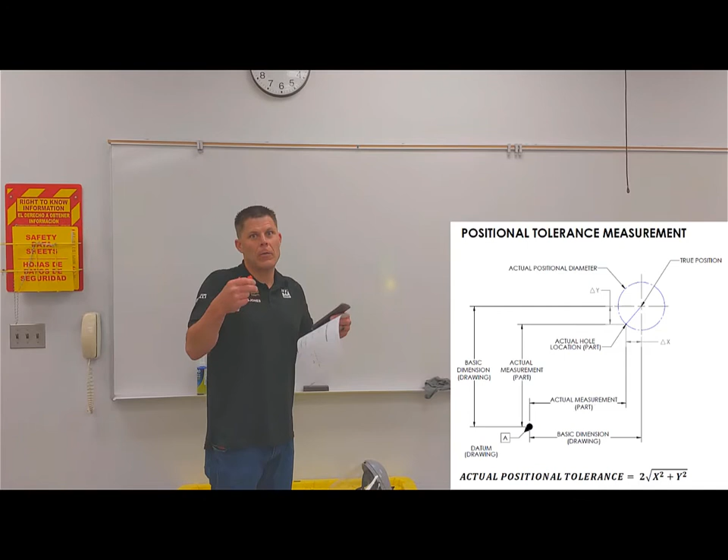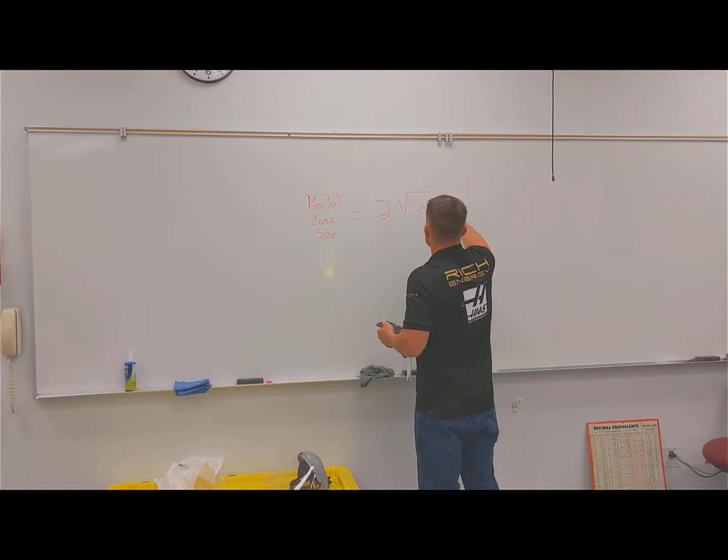Now that we've got our data for delta X and delta Y measurements, we're going to use the Pythagorean theorem to determine the radius value of the positional tolerance zone. If we multiply that by 2, we'll end up with the diametrical tolerance zone size. So rearranged by the Pythagorean theorem: positional zone size equals 2 times the square root of delta X squared plus delta Y squared.

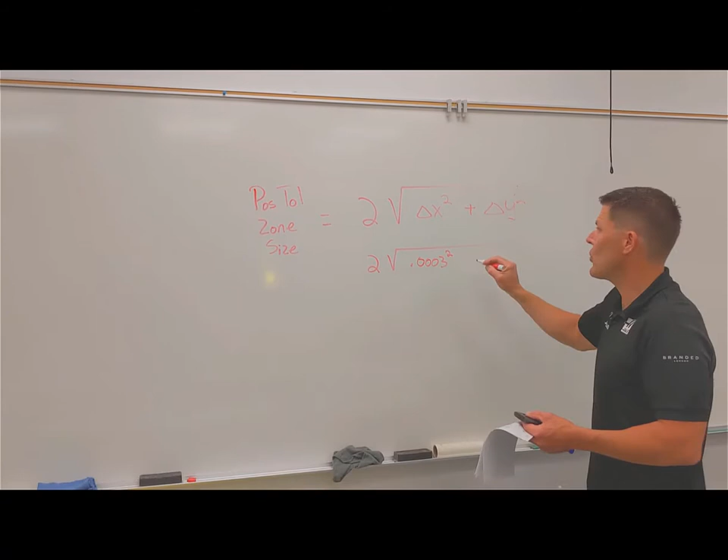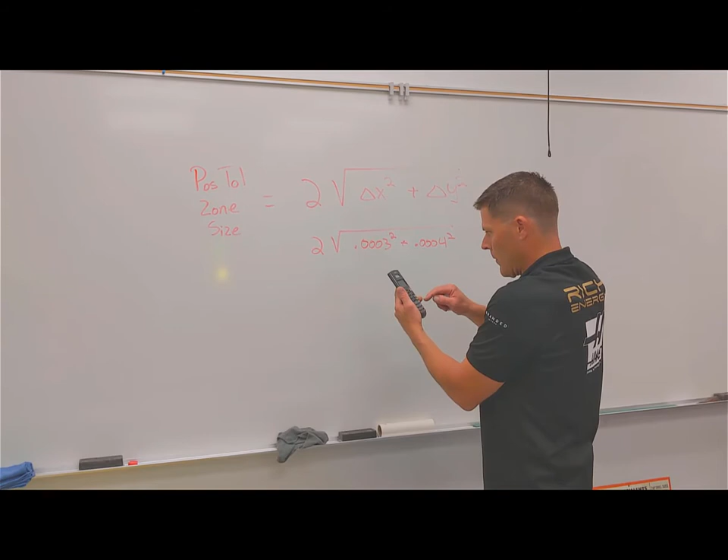So to calculate the positional tolerance for that reamed dowel pin hole, we simply have 2 times the square root. The delta X was 0.0003, so 3/10,000ths of an inch squared, plus 4/10,000ths of an inch squared. Let me grab the calculator. Square root of, parentheses, 0.0003 squared plus 0.0004 squared, close parentheses. We end up with a positional tolerance zone of 1/1,000th of an inch for that diameter.

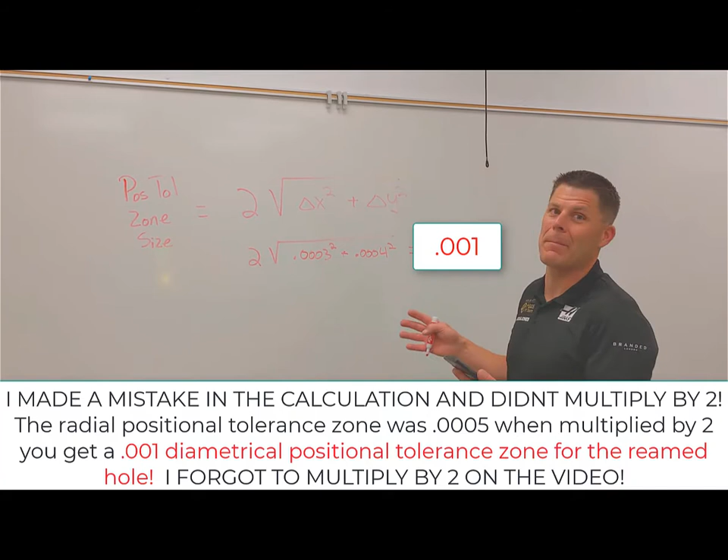That's pretty impressive, right? This is a brand new setup. Other than Brian, our department technician, and myself, no one else has run parts on here. So it's making perfect parts. As people start to abuse the setup, that's when things go awry and tools start to get worn down.

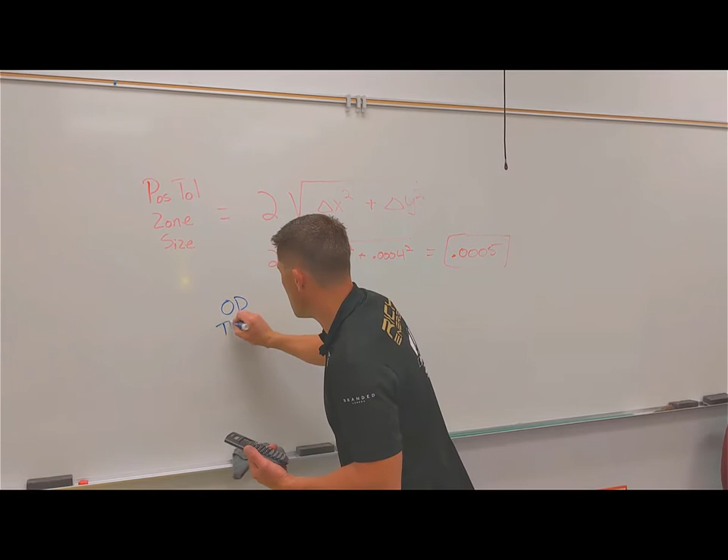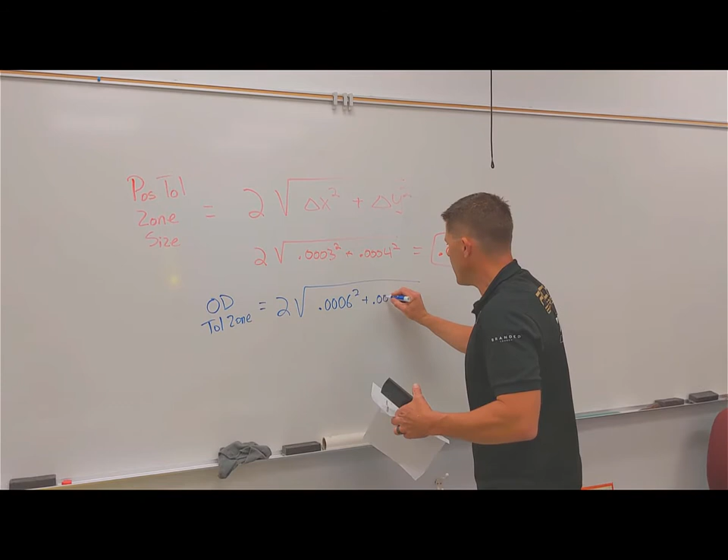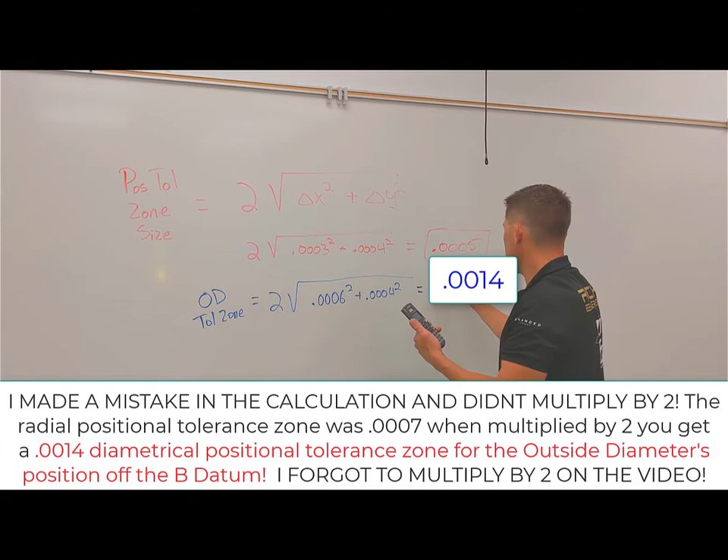But let's do one more calculation now for the positional tolerance on that outside diameter. For the OD, basically for the dowel pin, the tolerance zone is going to be equal to 2 times the square root. Going back to my data, the OD's X was 6/10,000ths of an inch, 0.0006 squared, plus the OD's Y is 4/10,000ths of an inch. Let me grab my calculator and go through here. We end up with 14/10,000ths of an inch, the positional tolerance zone for the outside diameter. And this one here was the diameter for the dowel pin.

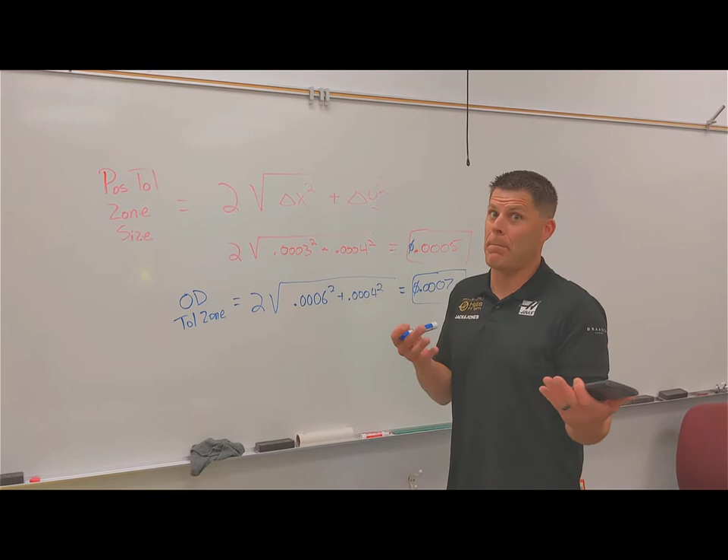Hopefully now you understand why positional tolerances are so beneficial in manufacturing. They give us 57% more area to locate that feature within the part. That's a bonus for manufacturing. And they allow us to hold material conditions, or hold tolerances at specific material conditions as well. We didn't do that in this example today, but we're going to do that in upcoming lab examples with the Geneva wheel.

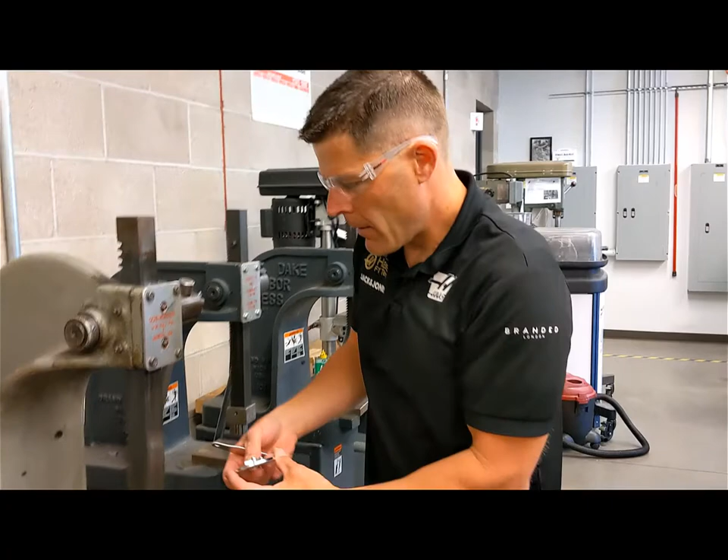So to do that, I'm going to slightly get the dowel pin started in the hole here. Now I'm going to put it down on the press, and I want to make sure the press clears the cam. You want to eyeball it, make sure you're not going to squish down on the cam. Then we have this small little tool to keep it aligned so it doesn't slip out. We don't want you putting your fingers under the press while trying to press in this part.

So when we have that pressed in, we now have our Geneva Drive Wheel fully ready to go. We're ready to put it in inventory, and we'll bring it back out in week number 5 when we do the tolerance stack assignment and assemble the Geneva Drive Wheel assembly. Have a great day.